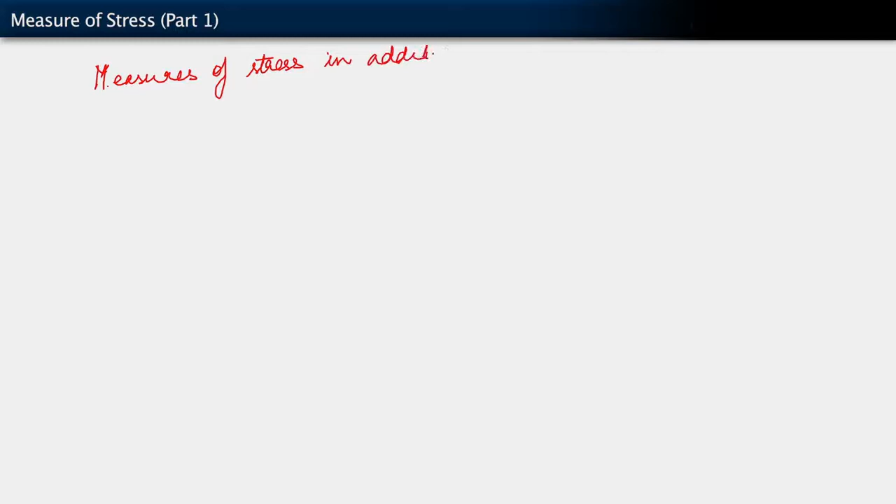So in this segment, we're going to return to our study of the stress, but with a reason, because we're going to study the stress and eventually come back to this notion of stress power. In studying the stress again, we are going to introduce additional definitions of the stress, but they are really different stress tensors. So we're going to introduce measures of stress in addition to the Cauchy stress.

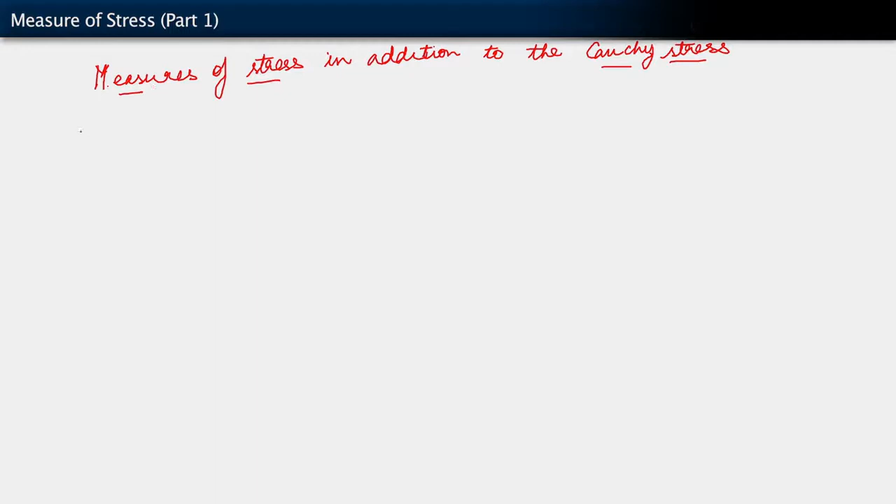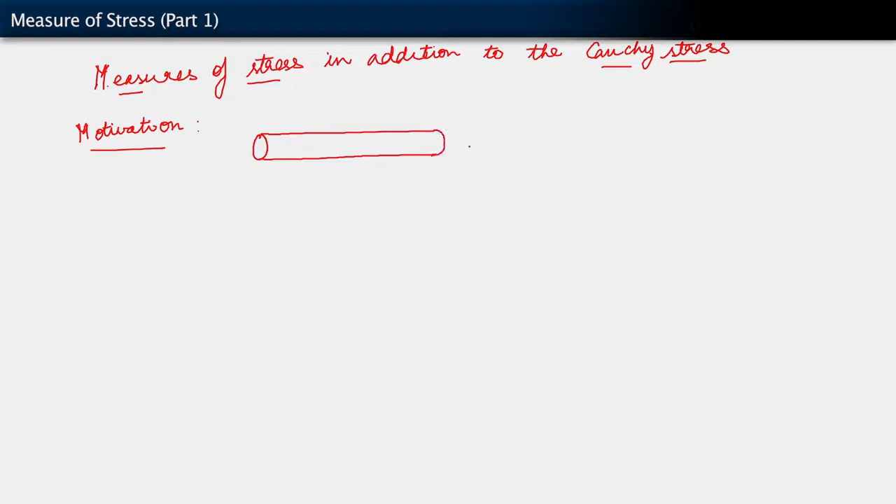Here's the motivation for doing this. Suppose we have a situation where we have a bar, a cylindrical bar, and we are going to subject this to a force. And since that force has to be balanced, we have a force at both ends.

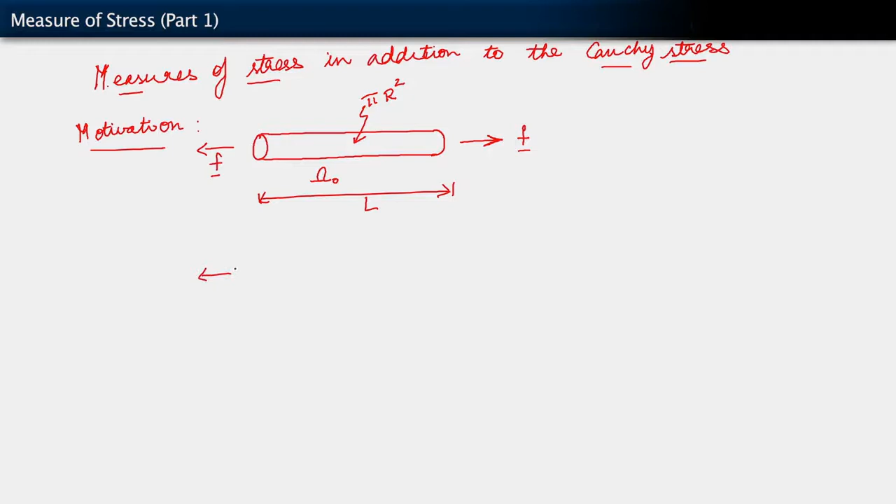Let's suppose that this is omega naught, the reference configuration. And let's suppose that the cross-sectional area of the bar here is pi capital R square, and the length here is capital L. We apply the force, and under application of the force, this bar gets elongated, a lot.

It's just my poor drawing that makes it look like it's given a varying cross section. Let's assume all of that is the same, so it maintains the cross section, the force is the same. But now let's suppose this has changed to pi little r square, and that this deformed length is little l. And this, of course, is omega sub t, and that's the deformation.

Let's suppose that what we have here is an incompressible material such as rubber. Suppose the material is incompressible, example rubber. Here, rubber is pretty much incompressible.

So what happens here is that we have pi capital R square L equals pi little r square little l. And therefore, if you look at the ratio of initial to final cross-sectional areas, it is in the ratio of little l to capital L. And the way I've drawn the figure, as you can imagine, every time you've played with a rubber band, rubber stretches a lot, so that ratio little l over L can be big, and therefore so can that ratio of areas. It could be very much bigger than 1.

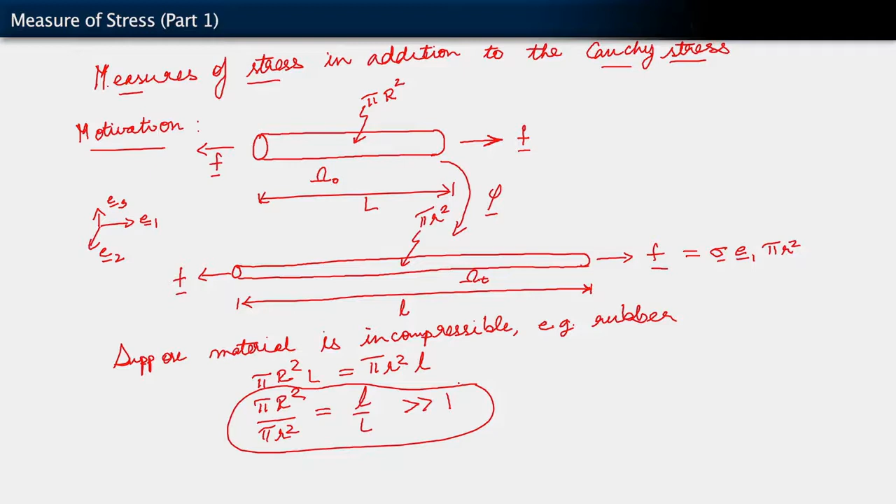Now, what tends to happen is that when we look at the force relative to the current area, we get our Cauchy stress sigma. However, this relation here tells us that the area has changed tremendously. So we may ask ourselves, well, what happens if we were to compare the force with respect to the reference area, the area before deformation?

Note that F over pi capital R square would be very much less than F over the current area, which is sigma E1. All right.

And furthermore, what we're getting to here is this idea that the area is changing so much, the body is deforming so much, that things really look very different between the reference and current configuration. Now, in this particular example, it's not such a big issue because I've shown you a uniaxial deformation case where you can say, well, I know what the original area is. It's not very difficult for me to measure the final area and so on. So there's not much difference whether you consider this or that.

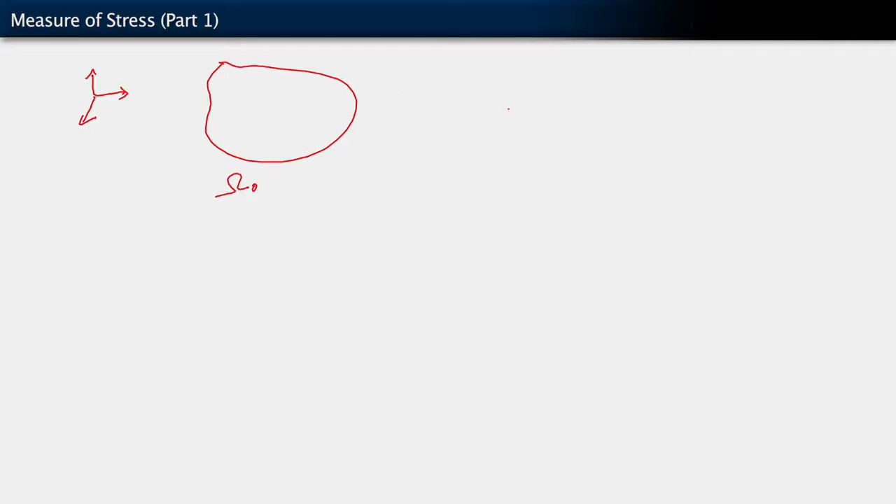Well, there may be a big difference numerically or in magnitude, but it's possible for us to measure both radii. However, consider a different situation where the body is not a nice cylinder, and furthermore the deformation doesn't keep it a cylinder. So consider the general case that we had here. This is rubber, and it's deforming. It has to deform, maintaining its volume, because it's incompressible. Same sort of situation. What you would see is that it could very well get really narrow and stretched out. That's omega sub t.

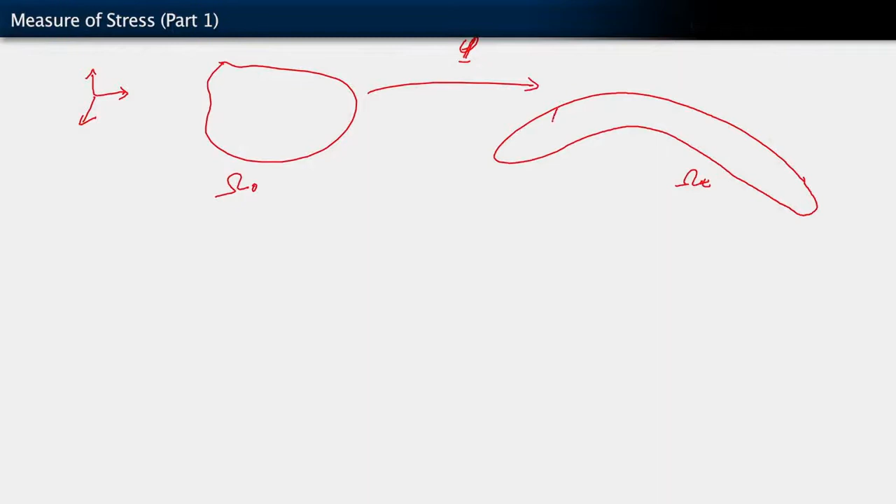Now, if you were an experimentalist trying to measure the Cauchy stress, it could get a little difficult here, because some of these cross sections may be difficult to access in an experiment.

This thing could be deforming in all kinds of funny shapes. In fact, you don't even know what the orientation of the ideal cross section is inside. So it becomes difficult in this case, at least experimentally, to measure sigma.

Remember, sigma is defined in that way. If that is your normal n, then we have sigma n equals t, traction. You don't know how that area is oriented on the inside, so it's difficult to say what the traction is. In what direction are you measuring the traction?

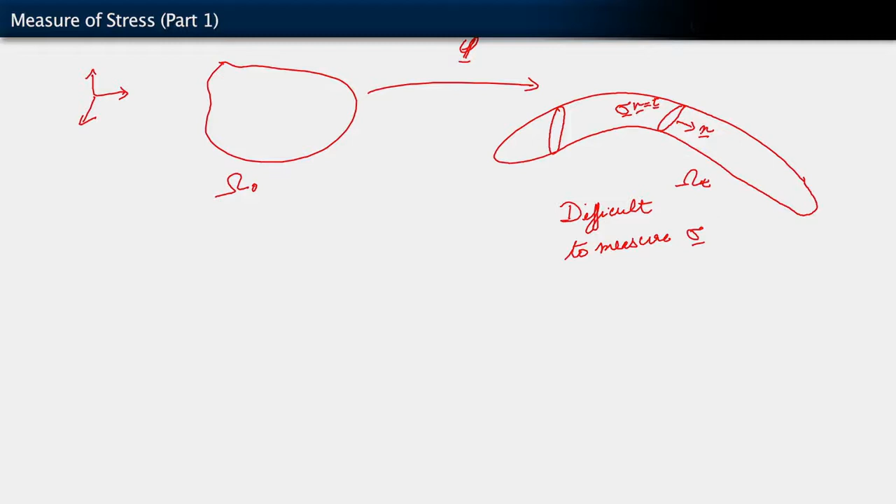Whereas if you had access to the reference configuration, because you know exactly where you start from, it becomes a little easier to measure these things. Since the reference configuration is fixed and what you start out with, you can decide where you start with. However, you don't know what's going to happen in an experiment, or what kind of shape it's going to finally deform into. That's why you're doing the experiment, and therefore it's often difficult to measure the Cauchy stress.

So this is motivation for another measure of stress where somehow you're referring it back to the reference area. What we want is a stress measure that is based on the reference area.

How may we go about doing this? The way we could go about doing this is the following. On this body, let's suppose that this is our normal direction n, and that goes off into this normal n. That same little elemental area — we have n dA here. That area vector goes on to becoming n d little a here.

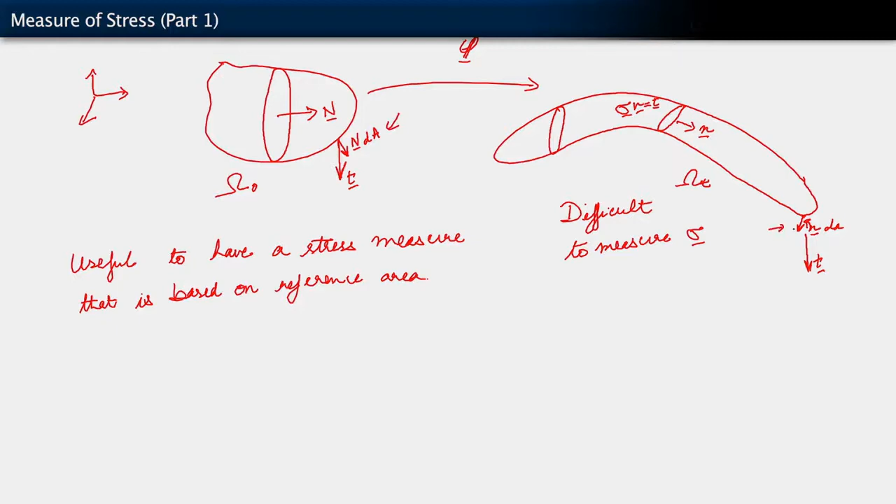So even though we're deforming the body, even though the body surface is changing, the orientation of the surface is changing — n dA, which had this orientation in the reference configuration, has gone to a different orientation here in the current configuration. In spite of that, the load by which we are deforming the body, the traction by which we are deforming it, is the same.

So for instance, this is the reference configuration of the body. The arrow here is the traction we are applying on it. The body deforms, and let's suppose that in addition to just locally deforming, it even moves to some other place in the configuration, but the orientation of the traction vector remains the same. That arrow remains the same between here in the reference configuration and there — the orientation remains the same, and the magnitude as well. All right, so this is the condition that we're considering.

Under this situation, we can say the following: look, in my reference configuration, I have the traction, which is related in some way to this area vector. I haven't filled things in — there's something that's going to come in this big space I've left here. Whereas back here, I have t equals some other stuff multiplying little n dA.

In both cases, I need to multiply this by dA to get a force. I need more room there. Okay, that's my force. And just for correctness, let me change this here. Let me use a capital T here because it's reference — a capital T here in the reference configuration and a little t here.

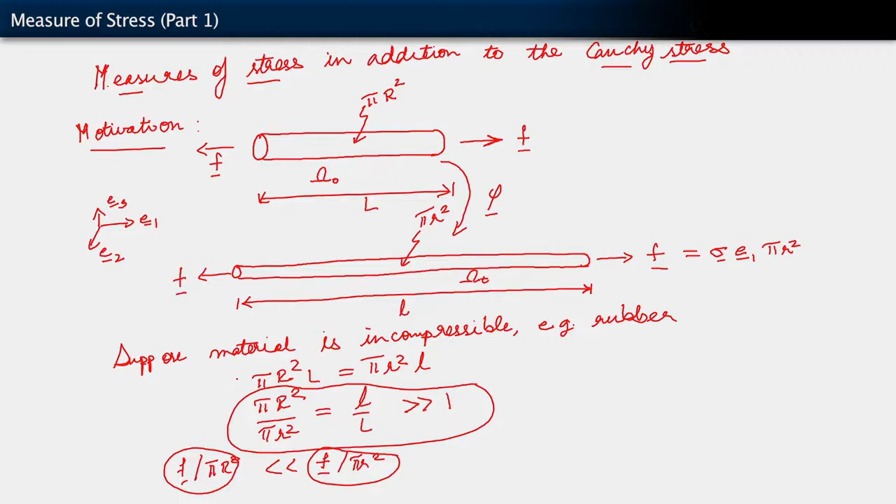As in this example, it's the total force which is the same. This means we have capital T d capital A equals little t d little a. So the external force on the boundary is fixed. Somehow what we're doing to the body from the outside, how we're loading it, is fixed. The body responds differently—it looks different in the reference configuration versus the current configuration. This is the condition we're imposing. So what that implies is that P N d capital A equals sigma n d little a.

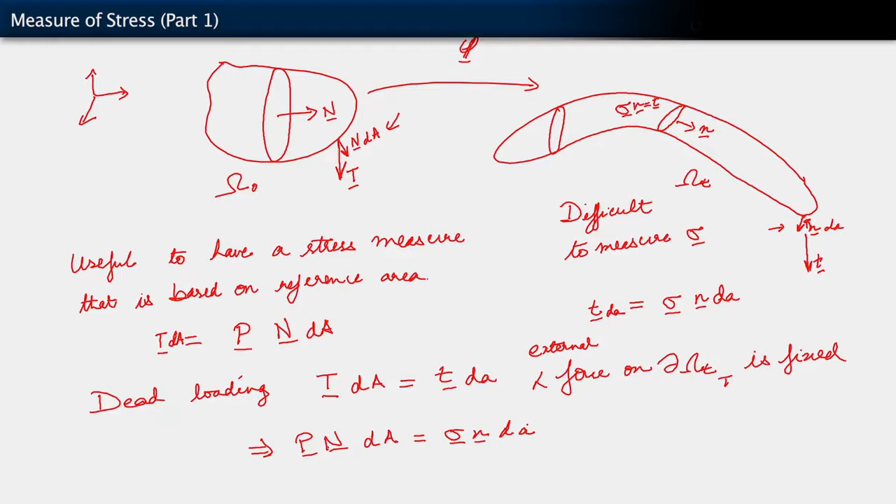We've encountered all these objects before except for this new symbol P. We're going to say more about it in a little bit. The way we do it is the following: we recall Nanson's formula.

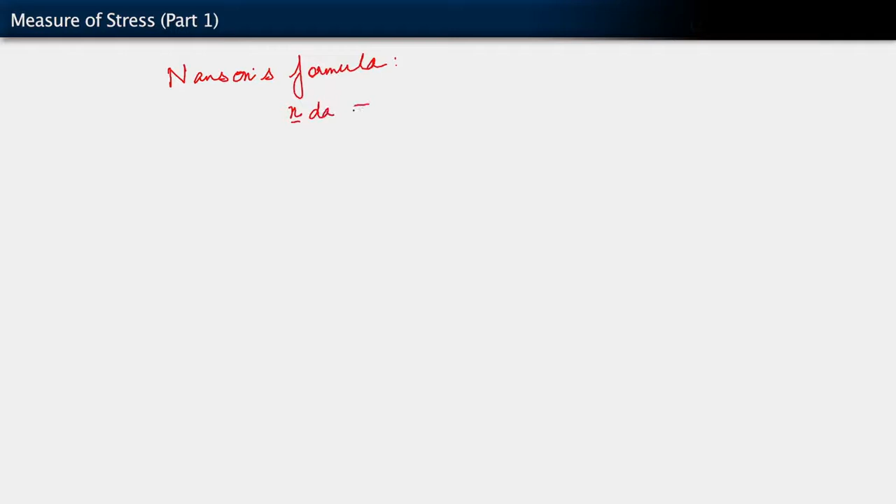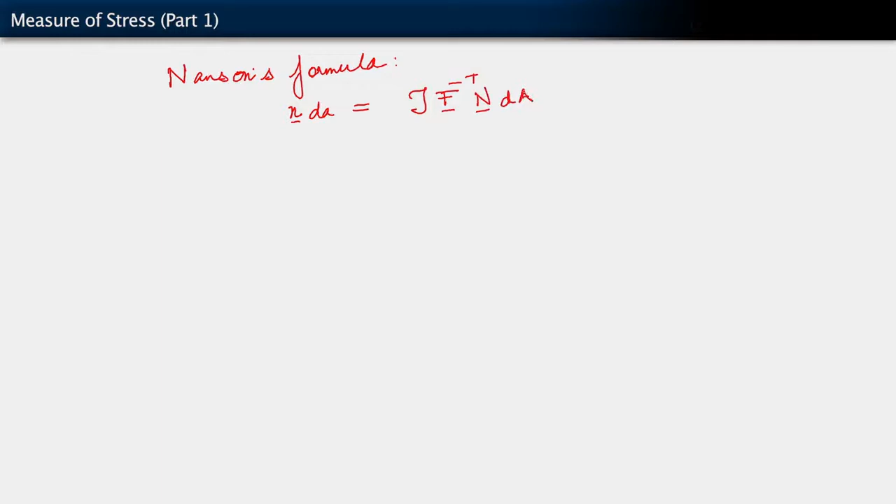Nanson's formula is little n d little a equals J, which is the determinant of the deformation gradient, times F inverse transpose, where F is the deformation gradient, times N d capital A. What that implies is that P N d capital A equals sigma. J is a scalar, so I can pull it out here: sigma F inverse transpose N dA. By comparison, we see that this new object P is indeed a stress. It is J sigma, the Cauchy stress, times F inverse transpose.

So this is a new measure of stress. This is called the first Piola-Kirchhoff stress tensor.

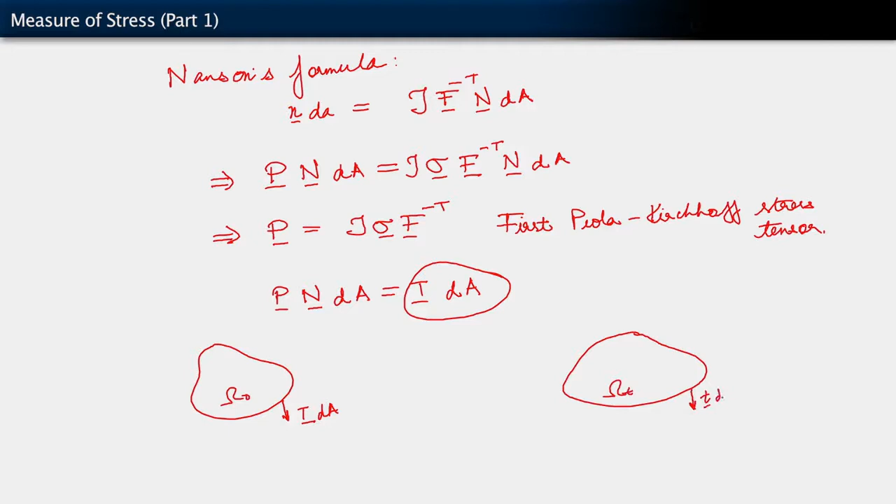Now, looking back at just the line before, it should be clear that because of how we've defined this, and the force on the right-hand side is fixed—it's always the same, always directed the same way in space and has the same magnitude—this T d capital A is the same between the reference configuration and the current configuration. Both are equal: T dA equals little t d little a.

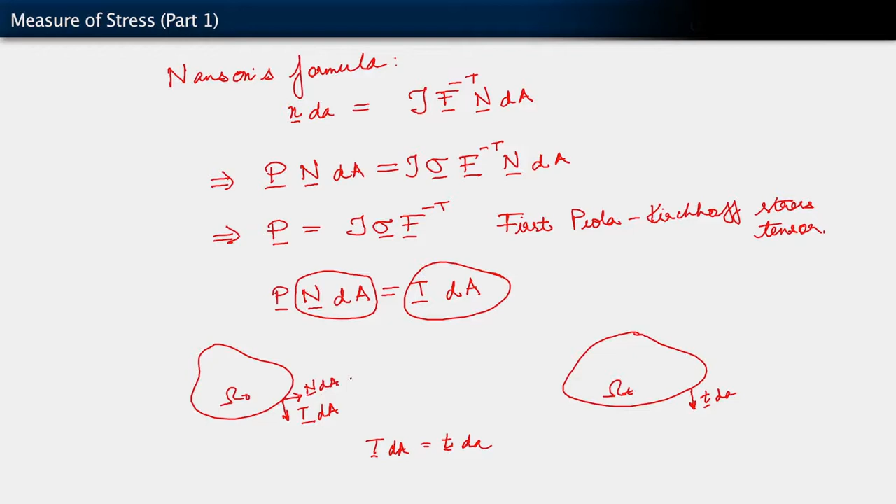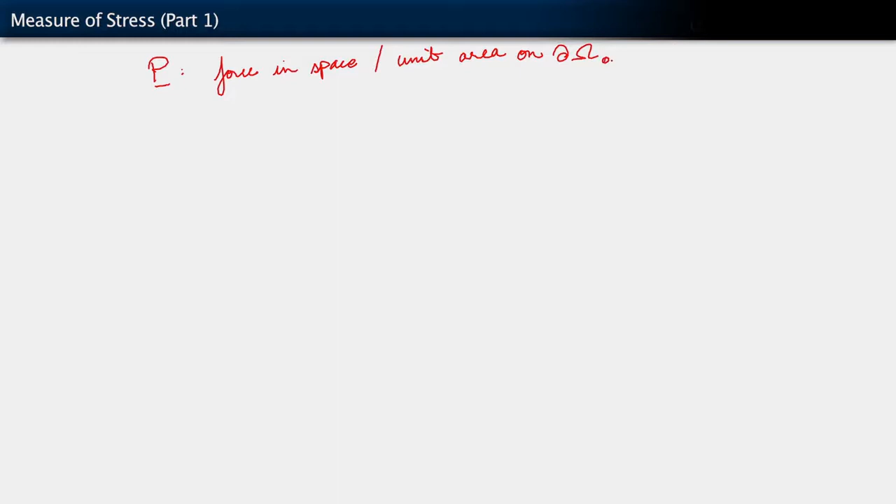So this tells us that this new stress tensor has force directed in some orientation in space, but the area it refers to is on the reference configuration. So P is thought of as force in space per unit area on the reference configuration. The relation we have is P equals J sigma F inverse transpose.

Let's see what the indices of P are. In coordinate notation, let's work things out. J has no indices because it's a scalar. Sigma has indices I, J. Now F inverse transpose—we write it as F inverse, but F inverse transpose will have indices j, J.

Here's why: it's basically F transpose—sorry, F inverse here. So we'd have F inverse, and the indices of F inverse are J, j. But then the indices of F inverse transpose are the transpose of this, so we flip the indices to get here. That's how the indices on F inverse would work out, so F inverse transpose has indices little j, capital J.

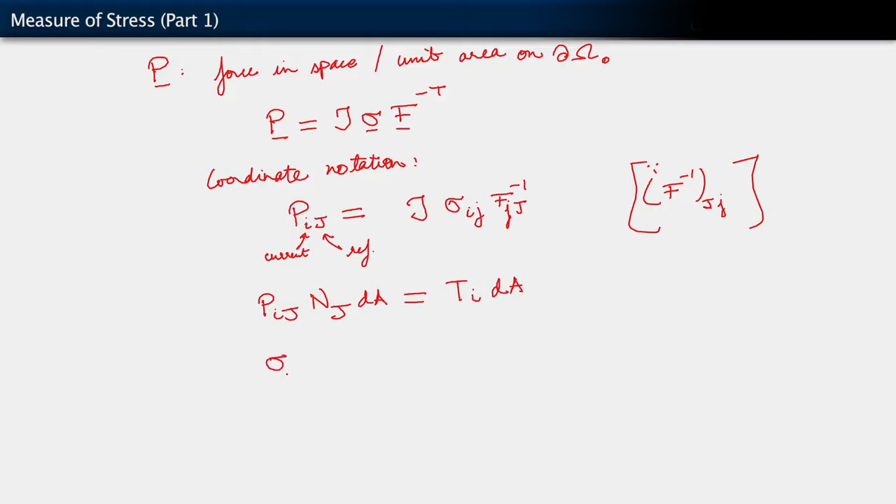So current, and that is reference. The way this works out when we put things together: P ij n capital J dA equals T i dA. And in the case of the Cauchy stress, we'd have sigma i little j n little j d little a equals t little i d little a. And these two are equal—that's how all the indices work out.

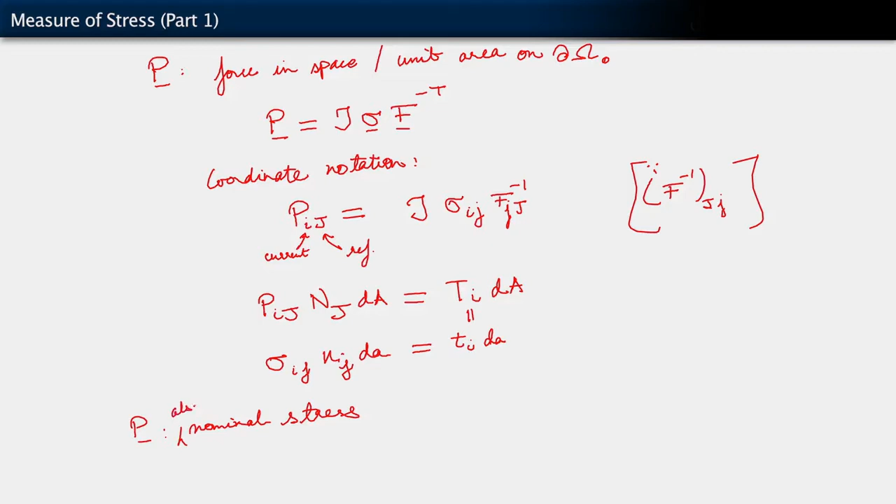The first Piola-Kirchhoff stress is also called the nominal stress. Chances are when you studied your first or second class in mechanics of materials as undergrads, you were introduced to the idea of engineering stress, a stress defined per unit original area. Well, this is it—this is the first Piola-Kirchhoff stress, or the nominal stress.